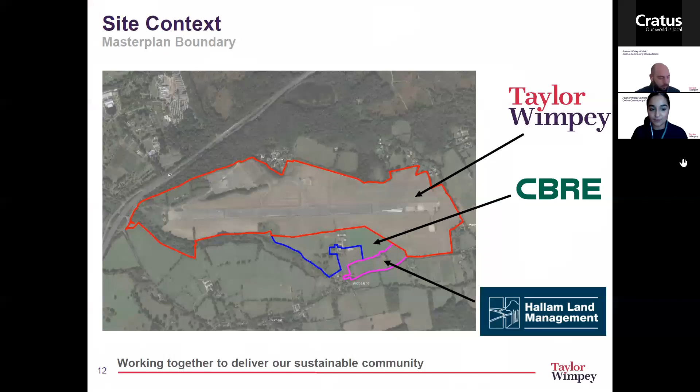We have a landowner working group with both parties to ensure the master plan is developed as a cohesive whole. Our vision is working together to deliver our sustainable community. What does this mean? It means we are working to communicate, engage and consult with you all in an open and transparent manner. This includes working with our delivery partner Vivid, who you heard from earlier, Guildford Borough Council, Surrey County Council, you as residents, the wider community and stakeholders. We are pushing to be as truly sustainable as we can from the perspective of climate change, biodiversity, transport and health and well-being. We want to bring this all together to deliver a new community centred around placemaking, forward-thinking, with a strong legacy, that is exemplar. By doing so, we aim to provide benefits to and integrate with the existing community surrounding the site.

Setting the planning policy baseline for us is the adopted local plan, as well as the emerging Lovelace Neighbourhood Plan and supporting supplementary planning guidance, which includes the Strategic Development Framework SPD. As set out in our first public consultation, the adopted local plan sets the principle of development on this site through policy A35, which seeks to deliver approximately 2,000 homes and approximately 100 extra care units on the site, as well as a suite of supporting non-residential uses. As set out previously, this will also include a large amount of open green space, which our team will touch upon later. Thank you, Antonis.

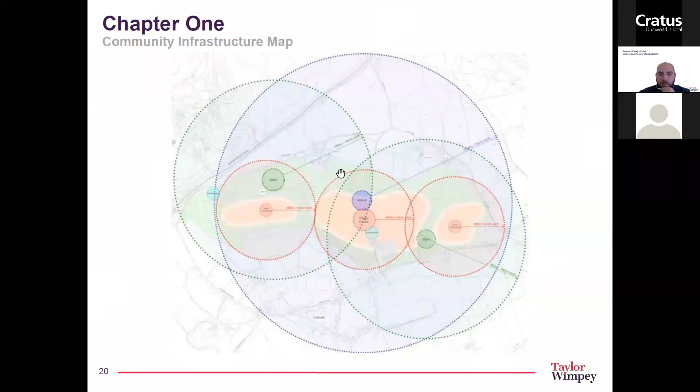Following the feedback we received from those 47 respondents, we consulted on density, employment, and the environment, and took the preferred options and overlaid them onto this diagram. For example, some of the feedback was a preference to have education in the center of the site, as shown in blue, as well as lower density on the peripheral, complementing the existing settlements, with higher densities towards the center.

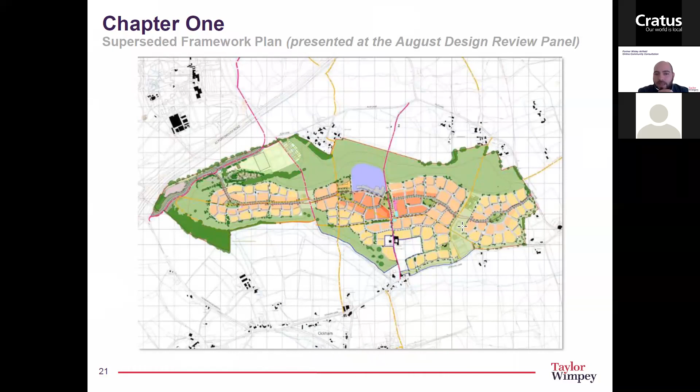So this is the same plan, but with a bit more meat to the bones. This was our framework plan, which has now been superseded. Indeed, Graham Kime, our master plan architect, will take you through the most up-to-date framework plan shortly. But this is the plan we took forward to the design review panel in August.

Looking at some of the meeting minutes on that feedback, some of the key things mentioned were that they supported the concept of the series of villages, so that's something we have been reviewing. We are also looking at creating a richer sense of place, so hopefully through the ideas map shortly you will see how we've interpreted that. And I think most important, the integration with the community, including stakeholders such as RHS Wisley.

As I mentioned, please do go to our website, www.wisleyairfield.com. In the documents library, there's lots of information there for your review.

As part of our commitment to engagement, we've also set up a community liaison group. The purpose of this group is to discuss aspects of the site in a lot more detail. It's formed of parish councils, the Guildford Society, and an array of stakeholders. We have also circulated a newsletter to those stakeholders. Please do contact your representative if there is any feedback you would like to inform us of. We typically meet every 2 weeks, and we have uploaded the presentations and meeting minutes of those meetings onto our project website, again for your review and feedback.

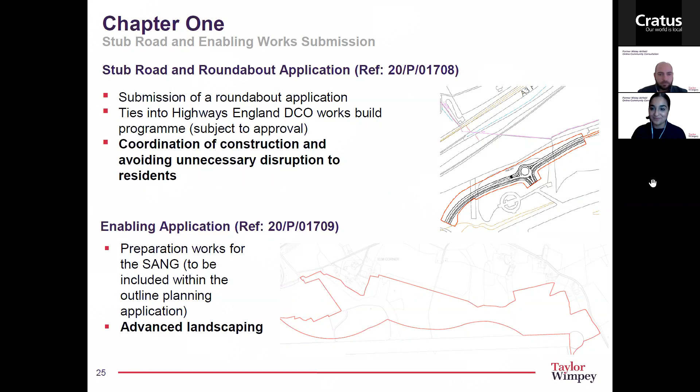Thanks, Adonis. Right, I'll now hand you over to Graham Kime, who will take you through the latest version of the framework plan, or the master plan. Thank you, Adonis. Good evening, my name is Graham Kime. I'm a director at Gardner Stewart Architects, and we're working with Taylor Wimpey as the master planners for this new settlement.

So at the last consultation event in July, we discussed a number of strategic ideas relating to the new neighbourhood, including how we might break it down into 3 different villages. And we discussed the types of facilities that we would be providing on the site and asked you where you thought the best locations for those facilities would be.

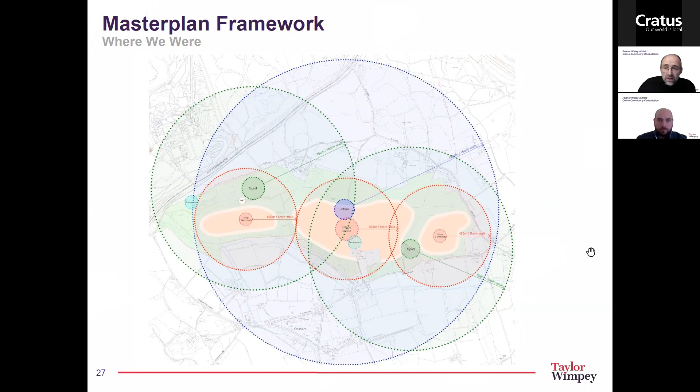And this starts to give some shape to our new community. But of course, that's not the design. A master plan is more than a response to a series of constraints and functions. It also has to create a place where people want to live and that can enrich their lives. So we are focusing on placemaking, on creating communities, and on building connections, physical connections, but also social, community, and visual connections.

Our concept proposes a series of green lanes and village greens, which are connected by a sustainable transport corridor. The new settlement will comprise the 3 villages set in an extensive country park, separated by wide swathes of green space, about 80 to 100 metres across.

The village greens create a sense of arrival to each village and a focus for community life. Each green is located where connections come together to form a natural focus, where one of the green lanes, which are the primary north-south pedestrian and cycle routes, meets the sustainable transport corridor that connects those three villages together.

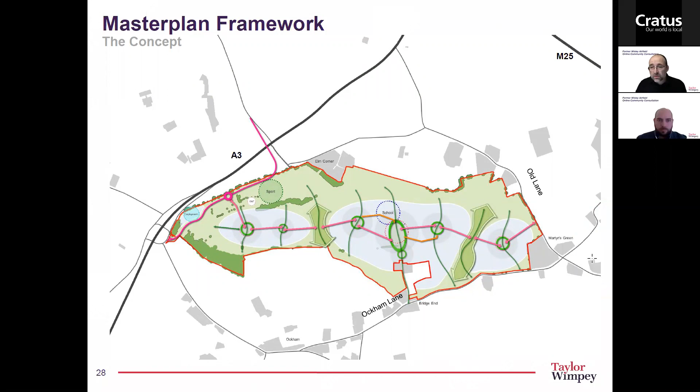At a more detailed level, the master plan is a series of localised design responses - ideas that relate to a particular part of the site or integrate a particular function. So we pose questions and identify design responses. For example, how should we respond to Stratford Brook and the wonderful woodland that forms part of the site? Or how can we encourage people to walk or cycle to the shops? This drawing is a cartoon of all of those ideas combined, so they interrelate and work together to reinforce the overall concept. So we'll now go on a journey through the site together.

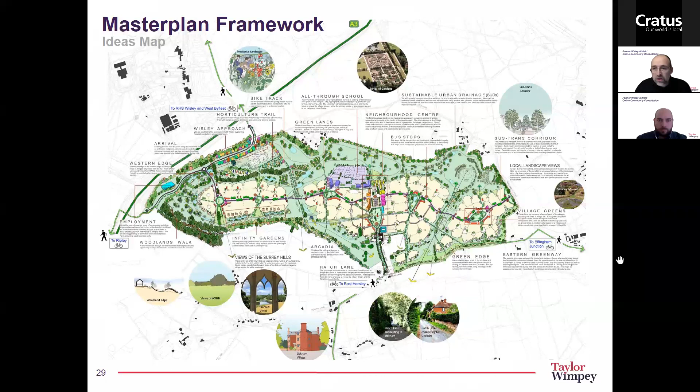Let's assume we're arriving at the Ockham interchange by car, bus, or cycle. This is the westernmost village closest to the A3. Number 1 here is the proposed Wisley Lane diversion that, subject to final approval, is being built by Highways England as part of the A3 improvements. That road will come off the Ockham interchange roundabout, pass through our site, and go over the A3 to provide new access into RHS Wisley. As we come along Wisley Lane, we can glance across the open space through the new woodland planting and the rolling topography we're putting in towards our development.

Number 2 here shows the arrival. We propose to access our new settlement from this road. At this point, there's a row of mature trees, part of an historic hedgerow which crossed the site before the airfield was built. Our idea is to follow the line of the hedgerow and create an arrival sequence. Firstly, we have the ponds and mature trees that signal the turning off the Wisley diversion. Then a pair of sentinel buildings form a gateway as you reach the arrival space.

As you reach the arrival space, the first village green, you crown the hill and are greeted with this view across the Surrey Hills. This view provides a connection with the wider context. It's part of the experience of the site that we need to retain, so we will open up this view at a number of locations.

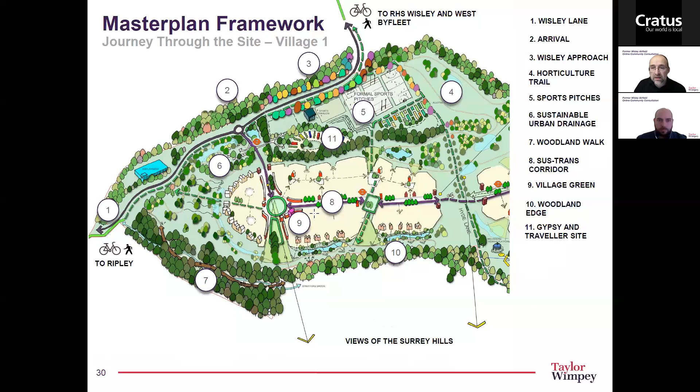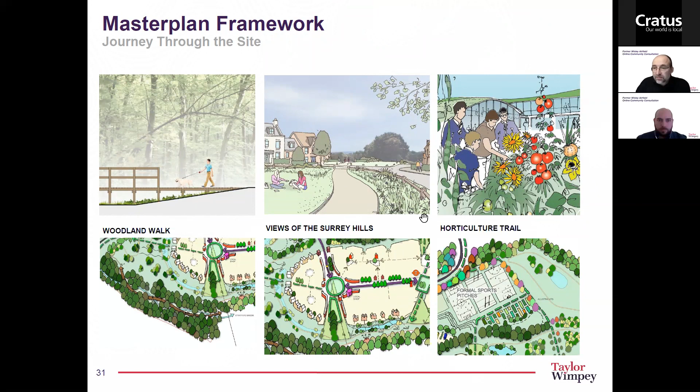And then we continue our journey back. We join the central corridor, which is designed to promote the use of sustainable modes of transport - we'll come to this a little later. So this summarises some of those ideas: the woodland walk with a raised boardwalk, the framed view of the Surrey Hills as we arrive into Village 1, and the horticultural trail on the route to Wisley.

So we'll move on to the central village.

This is the largest of the three villages, and it's separated from Village 1 by this green strategic corridor, which is about 100 metres across. So it's a wide swathe of green space that creates real separation.

And this is another one of those locations where you get these incredible views across the tops of the trees looking out towards the Surrey Hills.

Numbers 2 and 3 show the village greens and the green lanes that we described earlier. This village has 3 village greens, including a larger village park, which is part of the neighbourhood centre. The village park is located where 5 different public rights of way all converge, so it's a natural focal point, and perhaps there's an opportunity for some public art here to celebrate that.

For those of you who know the site, you might recognise this row of poplar trees at the top of Bridge End Farm, an existing landscape feature which helps to frame a really lovely view down towards the Stratford Brook.

Number 4 we're showing is the neighbourhood centre, and this of course would be the heart of the whole community. This contains a wide range of uses, including shops and cafes, employment uses and community buildings, arranged around a series of landscape spaces.

Also promoting the idea of multi-generational spaces, we've located the senior living parts in the neighbourhood centre, close to the primary school, where there's the most opportunity for people to engage with village life.

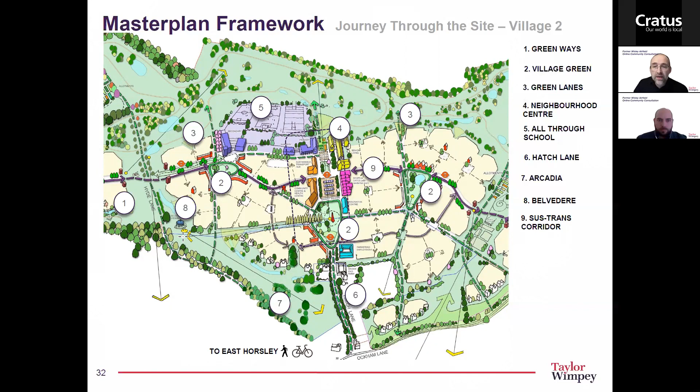So again, 3 of these ideas: the sustainable transport corridor, the neighbourhood centre with a view of some people enjoying some alfresco dining, and they're looking down towards Bridge End Farm, where we have some houses and apartments overlooking the central village park.

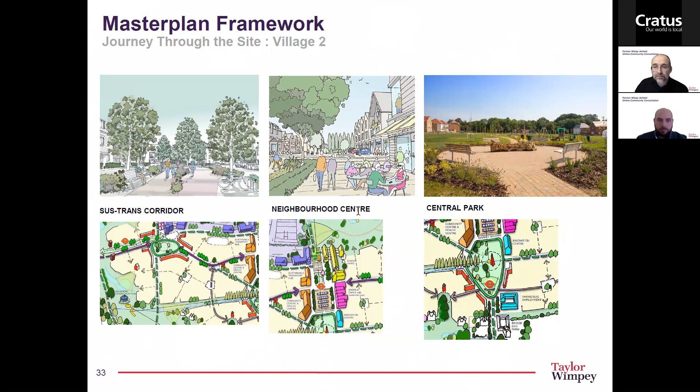So now on to Village 3 in the east of the site. Again, there's a strategic green corridor that separates villages 2 and 3, which is at least 80 metres wide and provides landscape separation. This is aligned with those stunning views across the Surrey Hills.

A viewing mound in the north of this area could take full advantage of those views and also provides views looking west along the full length of the SANG. This idea of ground modelling continues into the Greenway, where there could be a play mound that integrates natural play features into the landscape.

Along the southern and eastern edges, we want to preserve the rural character of both Ockham Lane and Old Lane. So we're proposing a setback of about 20 metres of green space. The houses along this edge, again, will be low density and low rise, with opportunities to break up that edge of the development with landscape.

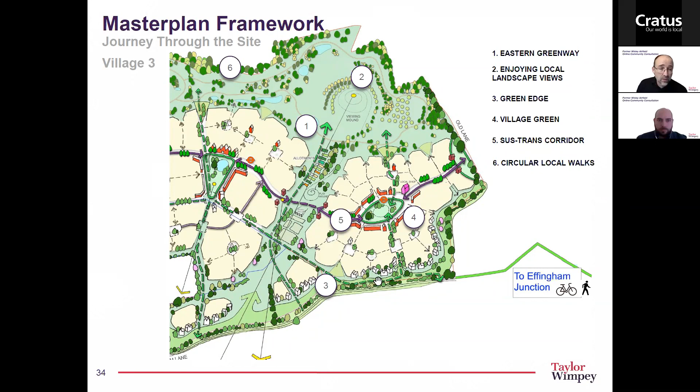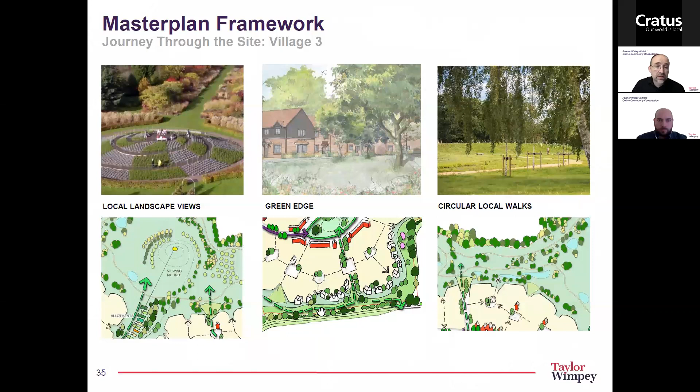So again, some images of those ideas, taking advantage of the views, using the topography. This is the Fruit Mount at Wisley, which has an access towards the glass house, the green edge and low density housing along Ockham Lane, and of course within the green space a variety of circular walks.

Following the various rounds of engagement and consultation so far, the framework has developed and evolved to address lots of different considerations and to incorporate new ideas and opportunities. This is the current framework that we're now working on.

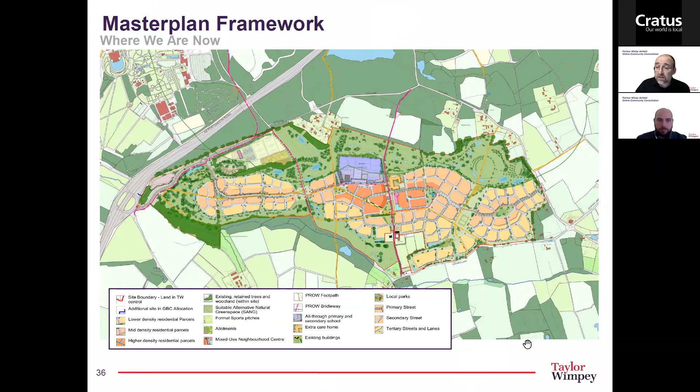This is a strategic plan. It doesn't show individual houses, but it does show the housing areas, the other land uses, and the public open space. The different shades of yellow and orange represent different densities of housing, and we'll discuss this again later in the presentation.

You can see that the village areas are focused around a series of village greens. As part of our design process, we've studied many of the surrounding villages to understand their forms, their architecture, and the spaces.

There are lots of different village greens in Surrey. Some come in a variety of shapes and sizes. They support different functions and are surrounded by different uses. Some are open to the countryside, like we're showing here, and some are enclosed by buildings and landscape. Many villages, of course, don't have a village green. But we felt that the village green idea would help our new settlement develop its own identity, and generate a sense of community and a sense of place.

Greens offer a point of orientation and an opportunity to pause. This is a sketch image of the first village green that greets you when you arrive from the west, with that view across the Surrey Hills that we can frame using the buildings and the landscape. That makes this green unique.

Each of the village greens will have a unique character and contain different functions and have a different community focus, such as a local shop that we're proposing in Village 1, but it may be a children's play space or a village pond where people can come together and engage in village life.

As Camille said at the beginning, we're submitting an outline planning application, so we're not designing the buildings in detail at this stage. The homes we're showing here are illustrative. We will be designing the homes and streets that take their cues from the architectural forms, features and materials in the local area. But this new settlement needs to create its own sense of identity, so we don't necessarily have to replicate those buildings, but we'd like to hear what your views are on the architectural approach we should take to make this place distinctive.

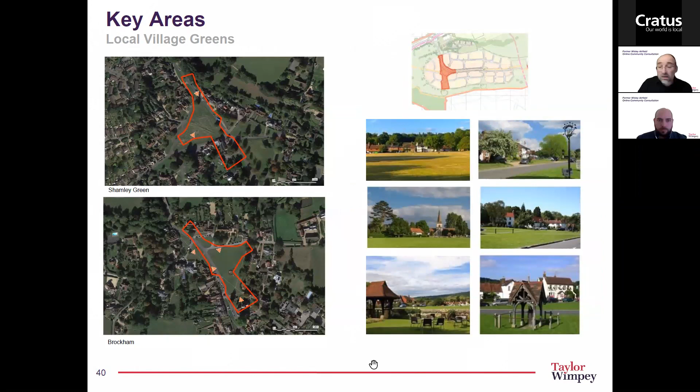The size of our village park, which is larger, is comparable to Shamley Green. And a market square is comparable in width to those linear spaces in the centre of Cranleigh.

Similarly, this green in Brockham is similar to the size of the green in Village 3. And the linear space that extends from the green, with its houses set back and its wide green verges protecting the pedestrian cycle route from the edge of the road, is similar to the approach that we're taking to segregate pedestrian cycle routes on the approach to our schools.

So I'll bring you back to this question: what do we think should be included in a contemporary village green? Is it the same as those examples I've just shown you, or is there something different? We've put some ideas here, such as children's play, public art and local information boards, but it would be much appreciated if you can suggest your ideas in the feedback forms as to what you might want to see in a village green.

So what sort of homes will we be providing? Across the site, we're master planning for 2,000 homes overall, of which just under 1,800 will be on the Taylor Wimpey part of the site, plus there will be 100 specialist senior living apartments.

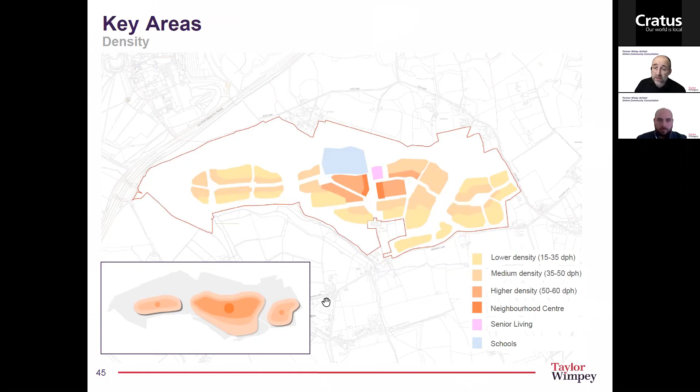This slide shows the potential heights of the buildings across the site, which follows a similar pattern to the density strategy. The lowest building heights are where we have the lowest densities, and the heights generally increase along the central corridor and towards the neighbourhood centre. But nevertheless, in general, the majority of the buildings will be between 2 and 3 stories throughout. There'll be some 4-storey buildings in the central spine and in the village centre, and in sensitive areas we can limit those heights to a maximum of 2 stories.

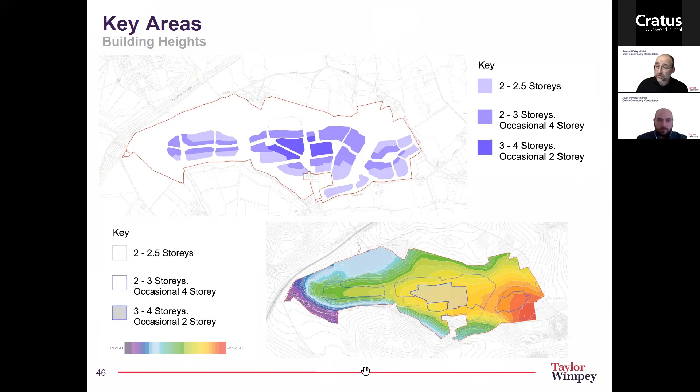On the second diagram, we've overlaid the massing zones onto the topography plans, which shows that the taller zone in the centre of the site is not the highest part of the site, shown here in red. We're currently looking at 3-dimensional studies to refine this strategy and help us specifically locate any of those 4-storey buildings and test how the roofscape will appear from the surrounding area.

These are some examples of how low density homes have been designed in other places. So it would be interesting to hear your views on the feedback forms regarding the style of architecture that you feel we should be designing here.

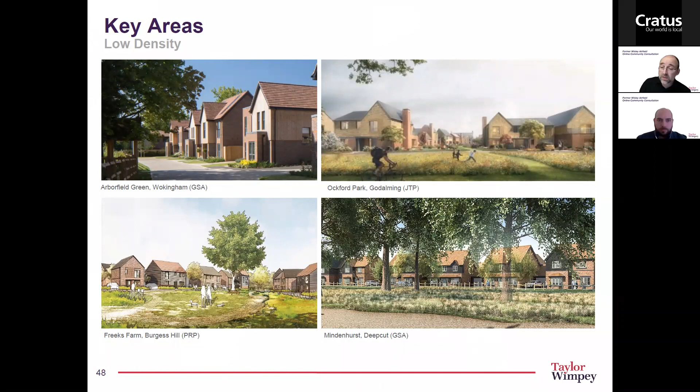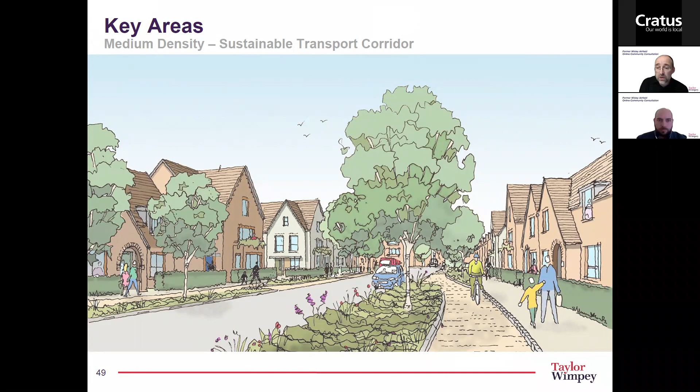Again, this architecture is illustrative, and the local building forms and materials we're showing here could equally be applied in a more contemporary way. These are some precedent examples of homes along a transport corridor with green spaces, wide verges, and more continuous frontages. The two on the right offer a more vernacular, traditional approach to the architecture, while the two views on the left are a more contemporary approach.

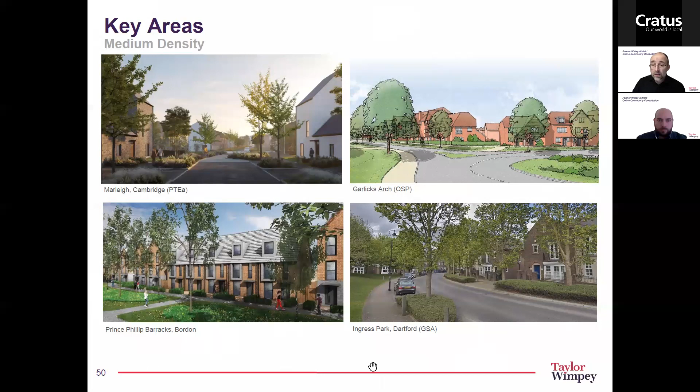Away from the central corridor, the other medium density areas will be designed as narrow streets and lanes. They'll be tighter and more pedestrian friendly, with slower traffic speeds and a variety of architectural forms and locally relevant materials such as brick and tile hanging.

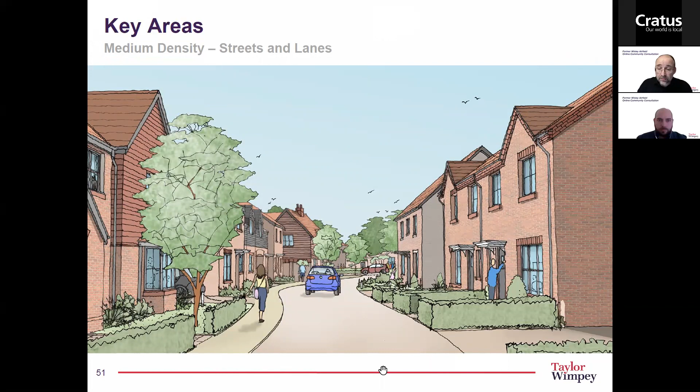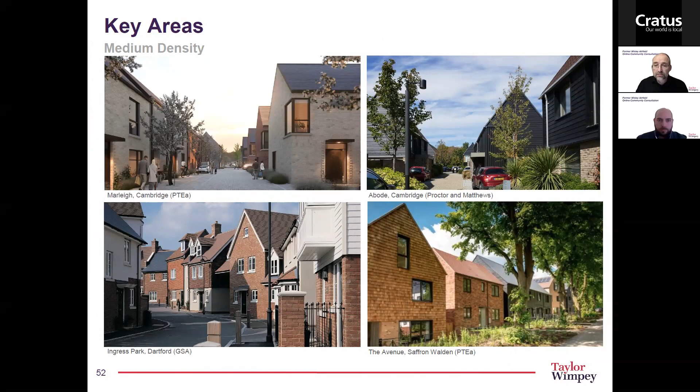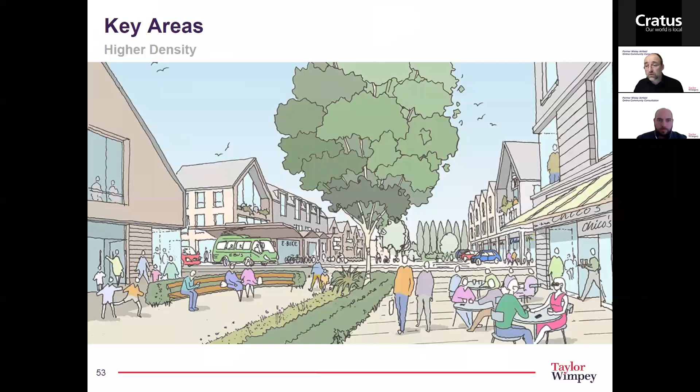And here is a possible view of the neighbourhood centre. Here and in the surrounding area, the residential densities become more intense. They are consistently 3 and sometimes 4 storeys. Here we're showing apartments above shops. In the distance, you can see some 3-storey terraced housing and some 4-storey apartments overlooking the village park.

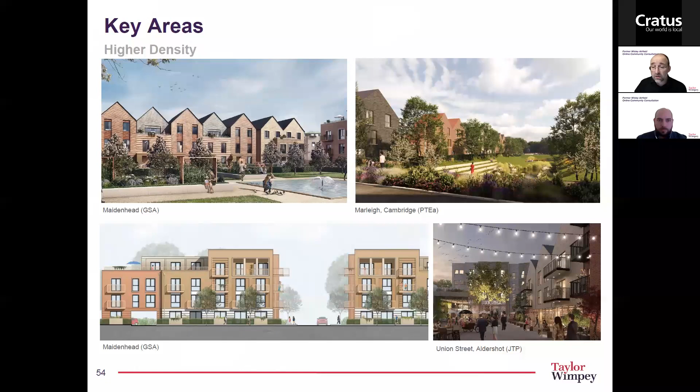Now, the Sustainable Transport Corridor, which you've heard me talk about, runs through the site and ties together all of these different areas and connects the different facilities. Whilst along that route its character will change as it passes through different parts of the development, it remains this constant element that helps to provide orientation.

And its purpose is to connect places, to encourage people to use more sustainable forms of transport, by making it as easy as possible to get from one part of the site to another by foot or cycle via this attractive and safe route. So what would it look like?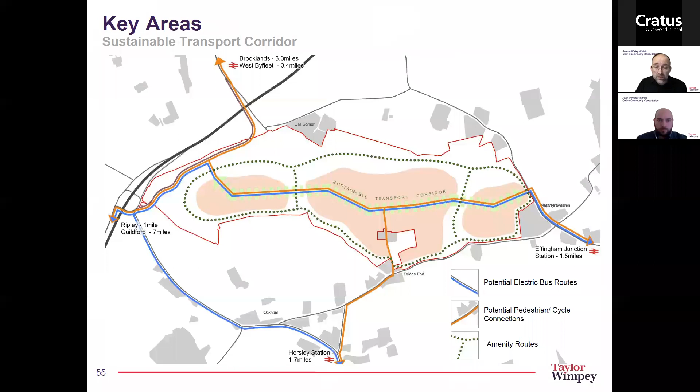This plan shows the character of the central spine as a wide green corridor with segregated routes for cars, for pedestrians and for cyclists, in order to reduce any conflict.

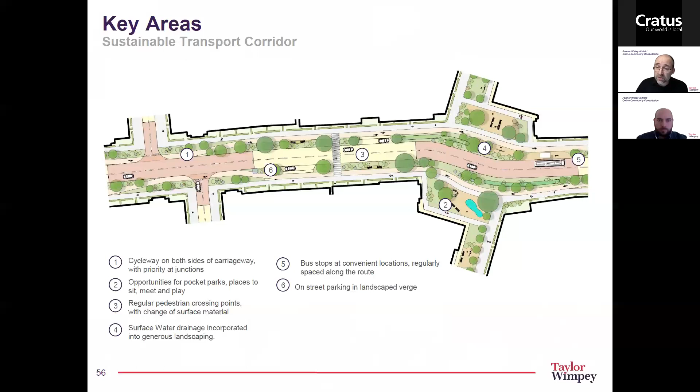Road junctions and crossovers onto driveways are minimised along this route, and where they do occur, the cyclists will have priority over the cars. So it will be an attractive, safe and very legible route that connects all parts of the new settlement, helping to make that shift to walking and cycling that bit easier.

And it's not just about movement, it's about turning a road corridor into something more communal and celebrating it. It's about creating a green outlook for more people, introducing pocket parks and village greens as a point of orientation, somewhere to stop and chat, for the kids to play on the way home from school.

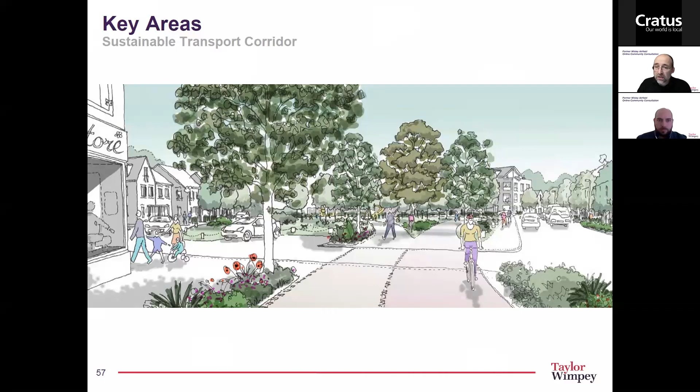And it's also this sustainable drainage corridor. So it's something more than a road, it's a piece of green infrastructure, and it's a positive piece of placemaking.

All of the green spaces are hugely important to the master plan, both in the way that they create an attractive and pleasant environment, but also the way that they contribute towards a green and healthy neighbourhood, providing opportunities for people to be active and to socialise, which I think we can all recognise has become increasingly important.

The greenways between the villages have a variety of uses, but include formal children's play areas. The village greens with their community focus, such as the local shops. The sports facilities, from formal sports pitches to more informal opportunities to ride a bike or kick a ball, allotments.

And communal growing spaces. And then in the neighbourhood centre, more formal spaces such as a market square, a school square where people can wait together for their children. And then we mustn't forget the benefit of green views from both within and beyond the site.

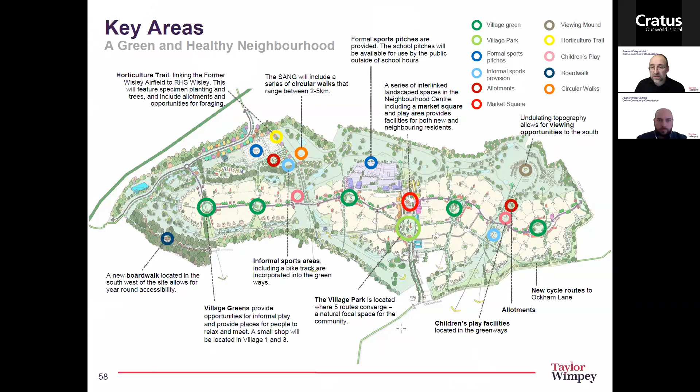So looking at the neighbourhood centre, this provides a focus for the whole community. It will include shops, including a food store, cafes, community buildings such as a village hall and a health facility, and employment uses. It will also engage with the schools and with homes.

So it's a genuine mix of uses. The neighbourhood centre, as I say, is arranged along the line of Hatch Lane. Hatch Lane is retained in the south as this lovely rural lane, but opens up to reveal the village park, where these 5 pedestrian routes converge.

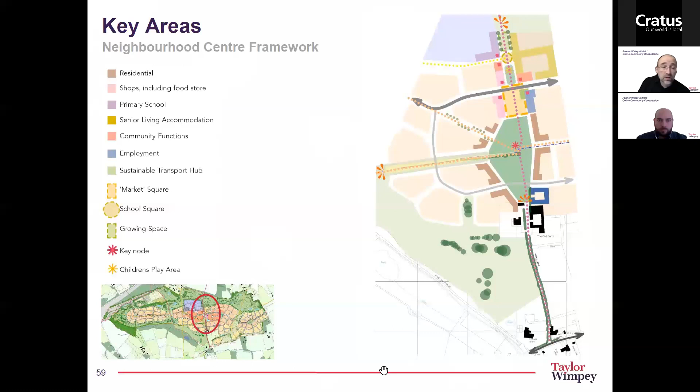And within the park, there will be a variety of uses, like a children's play space or terraced seating for an informal lunch break. And of course, the opportunity for public events that might be organised through the community trust.

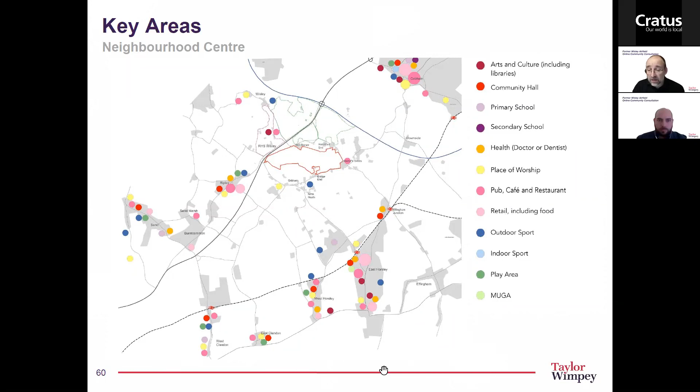And we've carried out surveys of facilities in some of the surrounding villages in order to understand what is already provided and the types of services that we may need to provide in our neighbourhood centre.

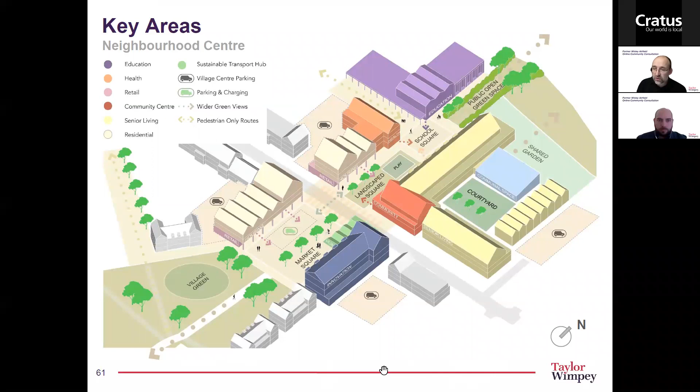These spaces will offer a variety of characters and places that relate to the buildings around them. For example, the shops face onto the market square, perhaps an opportunity for a monthly farmers market. A small piazza by the cafe for outdoor eating or having a cup of coffee in the morning. A landscape garden by the community centre, and a school square where parents can gather to chat at home time.

In terms of the building uses, we're providing a food store with maybe 5 to 8 smaller shops or cafe units, all with apartments above them. We've mentioned the village hall, hopefully run by the community trust, and we're talking to healthcare providers about the healthcare facility. There will also be significant employment uses.

We are looking seriously at how office space requirements may have changed towards the post-COVID world. Potentially approaches that provide support to people who work from home or close to home by providing flexible office space and co-working space - somewhere where you could hire just a desk or a meeting room, where you can get business advice or a photocopying service, that type of thing.

I think it's generally recognised that there will be more home working in the future, and this type of facility is an appropriate way forward that will add vitality to the neighbourhood centre and be a real community resource. In the green, next to the employment use, is the sustainable transport hub, where you could lease your e-bike or e-scooter. There will be rapid charging points for electric cars and potentially an overhead charging point for an electric bus.

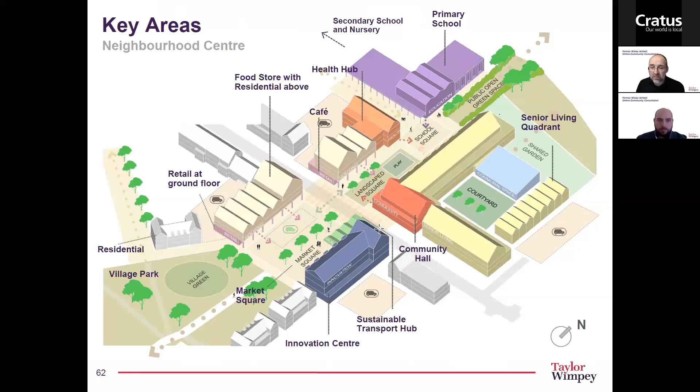We've put together a couple of images of recent neighbourhood centres that show different types of character, and we would appreciate your views in the feedback form on what you would like to see.

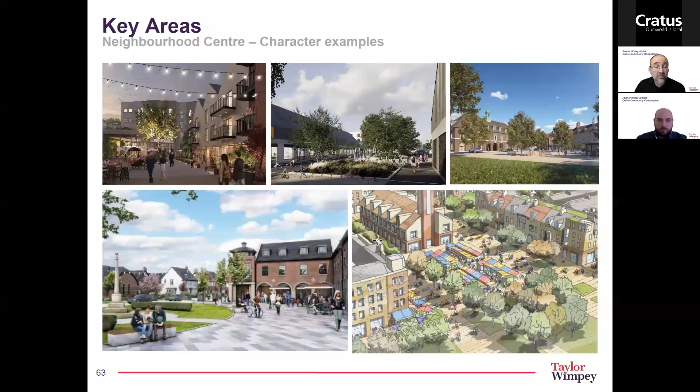I'll finish the presentation again with the view of our neighbourhood centre - a cafe with outdoor seating, the community centre on the left, and ahead the sustainable transport hub with its e-bikes and charging facilities, showing potential for an electric bus. There's a row of apartments in front of us, and a row of shops with apartments above.

So thank you very much. I'll now hand over to Colin Mackay, who will discuss highways.

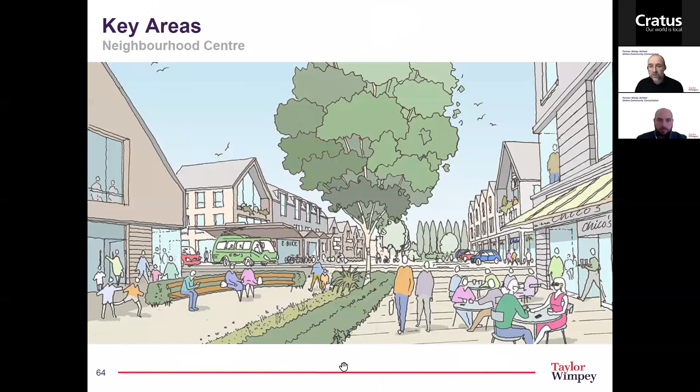Good evening, everyone. My name is Colin Mackay, and for those who did not attend the previous consultation, I'm the Technical Director leading the work WSP are doing on the transport aspects of the Wisley Airfield proposed development. Apologies for the quality of the visual of my face - I look a bit like Father Christmas in a snowstorm, so apologies for the technical glitch there.

A quarter of respondents answered they might agree, indicating that more clarity is required. There was also a lot of support for e-bikes and for good bus services. So we have listened, and we want to show you how we have progressed since then.

Firstly, an update on general progress being made on the transport assessment. We're developing the traffic model that will be used to predict the traffic flows and any off-site mitigation required. The next stage will be to have the model checked by Surrey County Council and Highways England to ensure it is fit for purpose. Once that has been done, we can assemble the future year flows and carry out the transport assessment, as well as inform the air quality and noise assessments required for the environmental statement. This is set to take place early next year.

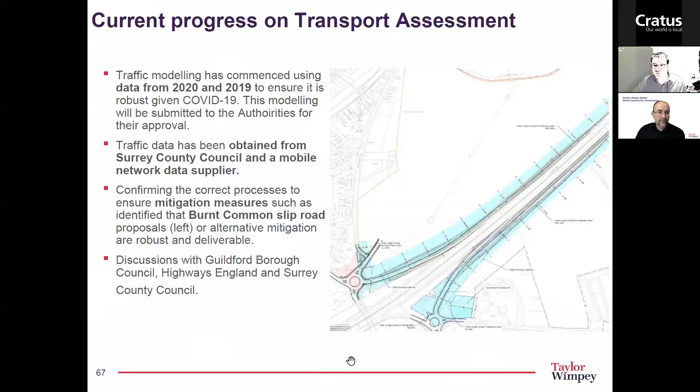Looking at our next steps on transport, that engagement will be taking place this year. We are conscious of the concerns about traffic raised during previous consultation in July, and we expect feedback on this aspect early next year once the modelling is complete. We'll also be carrying out ongoing engagement with stakeholders right up to submission of the planning application next year.

However, in the meantime, we want to set out how we are seeking to reduce traffic levels through the adoption and promotion of sustainable transport measures.

These ideas have been further developed by Guildford Borough Council in the Council's supplementary planning document, firstly in terms of the vehicular connections to the various external destinations shown on this slide, which also includes ideas on bus links to other communities.

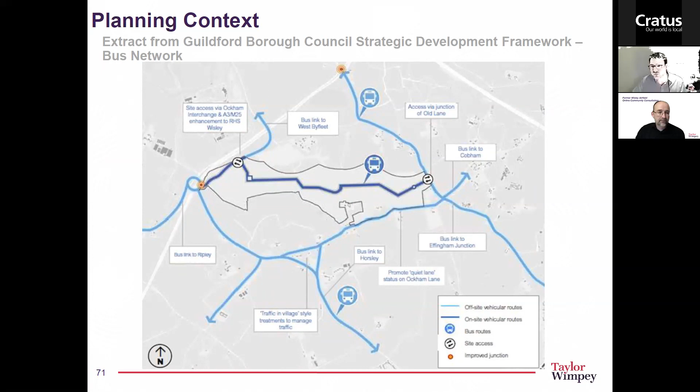And on this slide, what it terms active travel links, on foot and bicycle. These are all options we are actively exploring within the constraints we already know about from our detailed work to date.

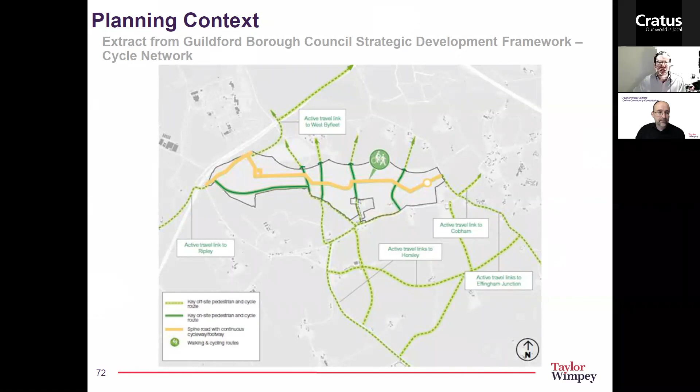As already stated, Taylor Wimpey are making this development an exemplar site for sustainability, and clearly transport is a major aspect of that agenda.

Our behaviour change expert Martin will touch on this later, but if the opportunities are made available, people are more likely to change, given the right encouragement. By making these opportunities available, we aim to change the mindset to one that sees and makes use of them.

Through thoughtful and intelligent design of the proposed development, people living on it will see that the opportunities are all around them, and through publicity and promotion, the benefits will be pointed out to them. Simple things like where we store our cycles make these decisions less agonised.

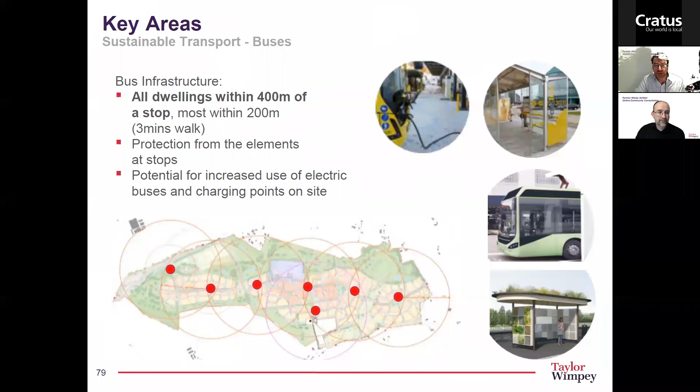The bus stops themselves will provide shelter and could also integrate green roofs or solar panels to maximise their sustainable contribution. Electric buses are becoming more accepted into operators' fleets and offer cheaper running costs, and some of you will know these are already being used in Guildford. We will future-proof this site with charging infrastructure to make electric buses a practical option.

Now, we also want to build on and bolster existing services. Some existing services would be enhanced to improve the frequency within existing communities, improving the offer beyond the site as well as serving the site itself.

The priority is to serve local railway stations, recognising the high proportion of rail travellers from this part of Surrey and the limited capacity of the car parks. So we'll be providing a high frequency service to match train departure and arrival times as closely as practically possible. Woking may also be served, with its higher frequency service to London and Hampshire and its retail and employment opportunities, although we recognise that train services have tended to be much busier and more crowded than the services via Effingham station.

Responding to feedback from the first public consultation events, a service to Cobham will be provided if we possibly can, using one of the fleet of buses, probably not as frequent as the other services, but this will allow, for example, shopping or personal business trips to this popular destination.

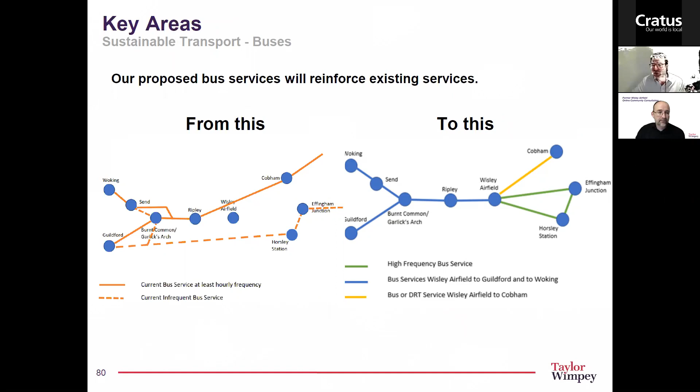The number of buses in the fleet will be increased to meet demand as the proposed development progresses. It's very important to have a bus service in the early years, although it will probably comprise smaller vehicles and a slightly more limited number of destinations will be served. However, a 7-day service will still be offered during the early period of the development.

In later years, a fleet comprising a mix of vehicle sizes will go to all the identified destinations, and a longer daily service on the key routes will be provided to serve leisure trips and late workers arriving home on the train. Bus services will be funded through the fares passengers pay, but in the early years, pump priming support will be available from Taylor Wimpey.

A predicted modal share for the bus service will be projected and validated using a range of other experience throughout the UK on similar developments. However, this will be calibrated to more local experience. The Guildford urban area is an important reference, having modal shares of up to 14% in some locations and typically up to 8%. On this basis, we believe the bus services we will be proposing can be supported without substantial ongoing subsidy.

I'll now talk a bit about cycling before handing over to Martin, starting with policy initiatives. As we're all probably aware, changes are being driven by international, national and local policy on transport. The Paris Accord, UK government policy initiatives and even prime ministers are raising the profile of cycling. It is essential to maximise the uptake of walking and cycling.

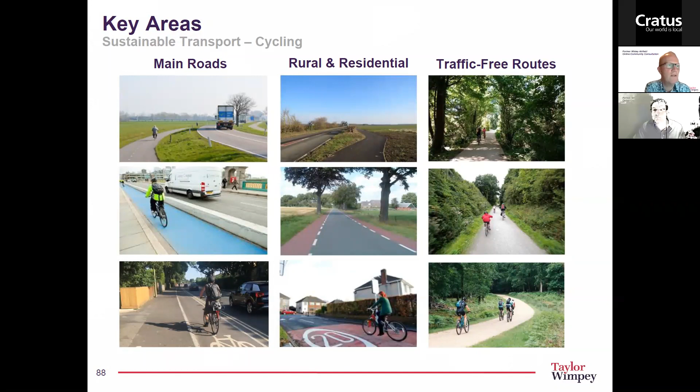When we are in conservation areas or other sensitive environments, we want to make sure that cycling provision respects that location. So in the left column, there's a couple of illustrations of road treatments that respect the local environment and slow traffic so that, again, cyclists can safely mix with general traffic.

Clear signing of routes is important. Lighting, particularly of off-road routes, needs careful consideration. There's an issue of whether to light or not, depending on circumstances. But where decisions are taken to provide lighting, there are solutions that can minimise upward light pollution.

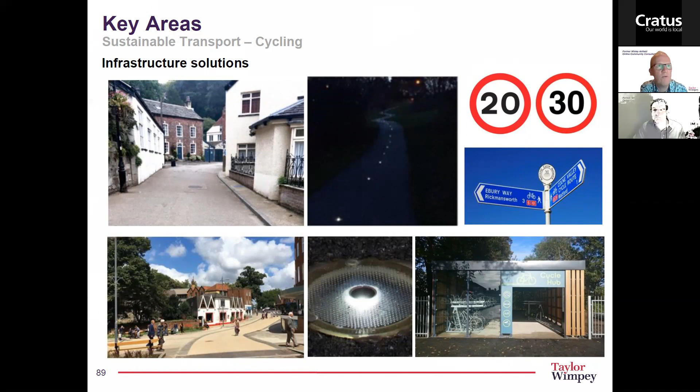Finally, secure, convenient cycle parking at final destinations is crucial, and there are plenty of good examples of high quality cycle parking at rail stations, for example.

So the policy challenge is to provide cycle links suitable for the average cyclist to 4 key local destinations: East Horsley, Effingham Junction, Ripley and Byfleet. We're currently developing our proposals for these links. All of these destinations are within easy cycling distance.

The bike journeys can be completed in 10 to 20 minutes, and they don't tend to take much longer than driving. In some cases, such as Byfleet, cycling will be a lot quicker than driving because we can go in a much more direct route.

We're currently looking at different route options to these destinations and considering appropriate types of cycling infrastructure as highlighted in the previous slides. I've produced a map there, and in red lines we've labelled our preferred routes to the 4 key destinations. In green solid lines are Surrey County Council existing routes, and in green dotted lines our Surrey County Council aspirations for future cycle provision.

So we're also considering how the connections we deliver can link into existing routes and future networks. We hope that this shows how our proposals will link strongly with existing and planned infrastructure to substantially increase the network of safe cycle routes in the wider area, making it possible to reach a range of destinations, not just for residents of our new community, but enabling many from surrounding communities to confidently and safely make cycle journeys.

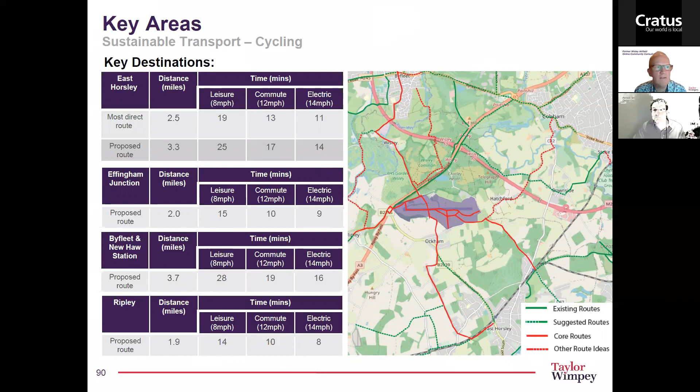And questions that we'd particularly welcome feedback on include: are there any other cycle routes to key destinations that we should be thinking of?

And just a word on promotional measures. We would undertake a lot of promotional activity through the travel plan to maximise the uptake of the sustainable transport services and facilities we plan to provide. There would be travel plans developed for different elements of the development, including the residential, the employer and the schools.

Possible promotional measures that we're currently working on include the following. Developing a high quality website and travel app to provide up-to-date information to residents and site users on their travel options and providing easy access to some of the services we'll offer. Welcome packs provided to residents showing the facilities available on site and in neighbouring settlements and the travel options available to them. Sales staff would be trained to advocate sustainable transport options when people are contemplating moving here.

As much as we can, we want to start influencing the way people think about their travel options before they move in. There would be a programme of ongoing support for sustainable travel, including social walks and social rides, bike tryouts, cycle training, doctor bike, maintenance classes, as well as car club demos.

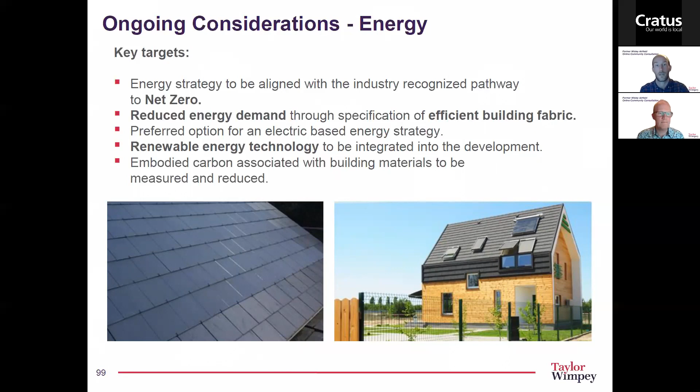Hi, thanks Martin. Hi, my name's Sam Hart and I'm a director at Davies Landscape Architects. We've been working closely with the architects and ecologists to create an attractive and multifunctional landscape which will protect, restore and enhance the existing sensitive features whilst providing opportunities for new landscape experiences, users and habitats.

These are grouped together under the banner of Green Infrastructure, or GI. We have set out the following slides to show how this has been progressing and how comments made in the various consultations have been incorporated into the developing landscape.

The last year has really emphasised the importance of easy access to open space and contact with nature for our mental and physical well-being. We aim to create a series of different landscapes and experiences which will be interconnected and provide multifunctional green spaces which will be accessible by all ages and abilities.

The landscapes will form an important element in the character and setting of each village, as well as bringing GI and biodiversity into the heart of each development. The GI will also afford opportunities to improve air quality, reduce noise from the A3 and alleviate drainage issues, and will play an integral part in the sustainability of the development.

It will also form an adaptable, robust landscape framework which will be resilient against the effects of climate change and will endure into the next century. As part of this process, it's our aspiration to work closely with RHS Wisley to benefit from the innovation and research into plant selection and management.

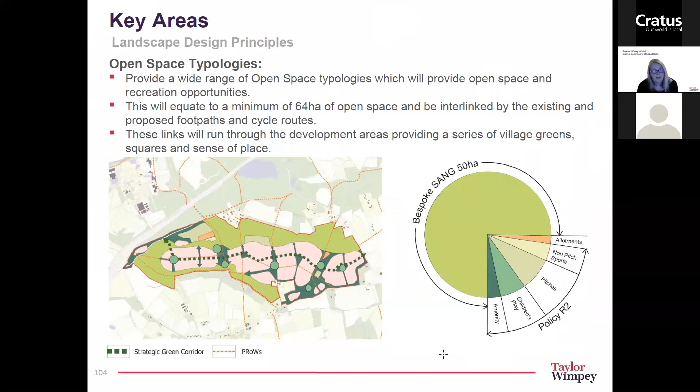The existing landscape features provide opportunities for 2 different types of SANG. To the north, the existing arable fields and hard standing will be transformed into a new wildlife haven with lots of features to draw people in.

The area will consist of a mix of native woodland, copses, grasslands and wildflower meadows, interspersed with ponds and linear swales to add interest and further opportunities for wildlife. New landforms will be introduced to visually break up the openness between footpath and cycle links and create views and vistas towards points of interest and opportunities for natural play.

The routes and views will be supplemented with art and sculpture installations, as well as seating areas and picnic benches. The northern SANG will also include a trim trail or a park run route which will link to the villages.

The southern SANG runs along the Stratford Brook, and the wet woodland and steep southern slopes provide an alternative range of habitats and visual experiences. These experiences will focus on the existing mature wooded Stratford Brook corridor and will include the introduction of a boardwalk, which will pass through the marshy grassland and bluebell areas and has been brought up in previous consultations.

The steeper slopes will be managed for species-rich grassland and be interspersed with drainage features to create interesting focal points and habitat opportunities. The southern boundary around Bridge End Farm provides opportunities for key views of the North Downs, and these will be incorporated into the vistas and routes.

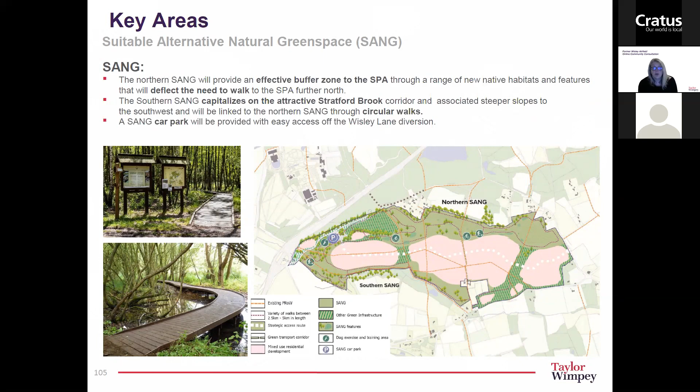Play forms an integral part of children's development and an important element to building a community. The proposal will afford opportunities for a wide range of experiences and environments for young and older children to play. These will be set within the recommended walking distances and along safe routes.

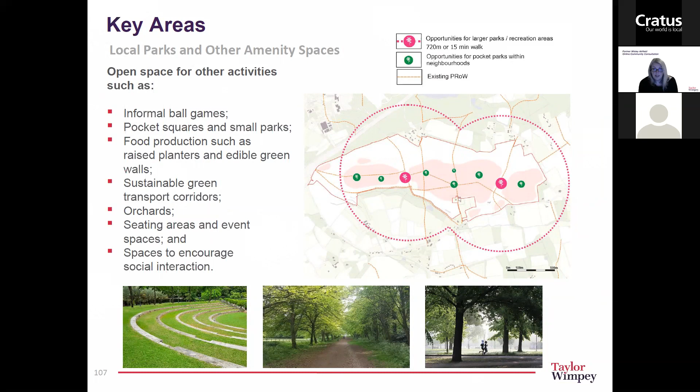It's important to harness the mental and physical welfare benefits that growing food can bring, and having the opportunity to produce food on your own doorstep. These will range in sizes from the more traditional allotments to other localised community and education opportunities. We've just outlined a couple of suggestions there, but there's a lot more available opportunities arising. The SANG provides opportunities to incorporate informal food gatherings such as foraging routes.

The ongoing consultations have identified local concerns regarding runoff from the airfield. The drainage strategy is being developed to alleviate this situation and will capture all current and future runoff from the site. Flood risk will be managed in a positive way, celebrating water and its value as a precious resource not to be wasted. It will be a highly integrated and holistic system, linking the urban and green infrastructure.

It will also provide and enhance biodiversity opportunities and be used to create attractive features such as ponds, swales and rain gardens, and incorporate features such as biofiltration beds, art, play and education opportunities. The water and SUDS will be used to harvest and integrate public spaces.

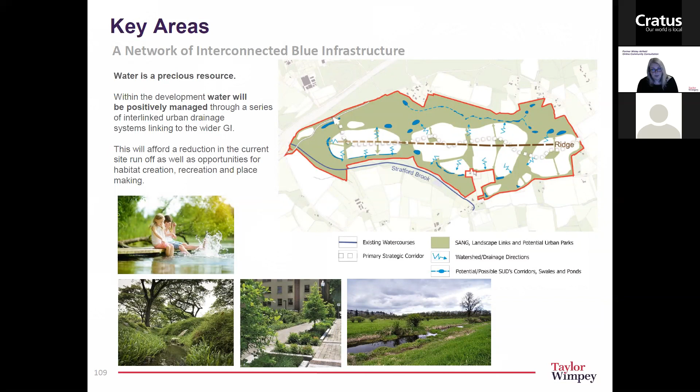I'll now pass you on to Rebecca, who will discuss ecology.

Thanks, Sam, and good evening, everyone. I'm Dr. Rebecca Brookbank, and I'm the Technical Director at Ecological Planning and Research Limited, an ecological consultancy. My job is to ensure that ecology and wildlife is taken into account in all aspects of the project and is protected as part of the scheme.

This includes making sure we have up-to-date survey information regarding the features present on site, carrying out impact assessments and designing mitigation, feeding back ecological requirements to the master planning and design teams, and providing advice and supervision for ongoing site investigations, as well as during implementation.

We know that local residents have expressed concern about the existing wildlife on site and how it will be protected. And I want to reassure you that conserving the existing features of ecological importance on site is our priority too. We're working very closely with the design team on this.

Some of you may have heard my colleague Jodie talk about existing ecological habitats and species at the site during the last public consultation. So this time I'd like to share our thoughts on how we can integrate biodiversity into the whole development, and in doing so, mitigate ecological impacts, create new habitats and features of ecological value, and ensure overall gains for biodiversity are achieved.

We had some really good feedback on this from the previous public consultation, so thank you to those of you who contributed. We're committed to delivering biodiversity net gain, so I'd first like to talk a bit about this concept and then look at how we can achieve this at the former Wisley Airfield.

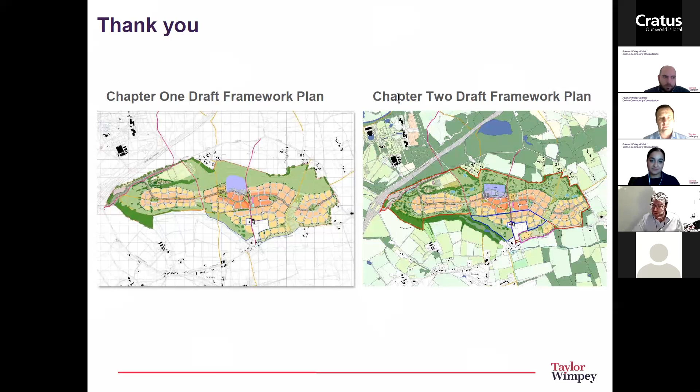We're also looking at routes to West Byfleet along Wisley Lane. Again, there are treatments we can put in place on Wisley Lane, which is a fairly lightly trafficked road beyond the RHS access, and the focus there will be to use the existing infrastructure to get up to West Byfleet with suitable enhancements along the way.